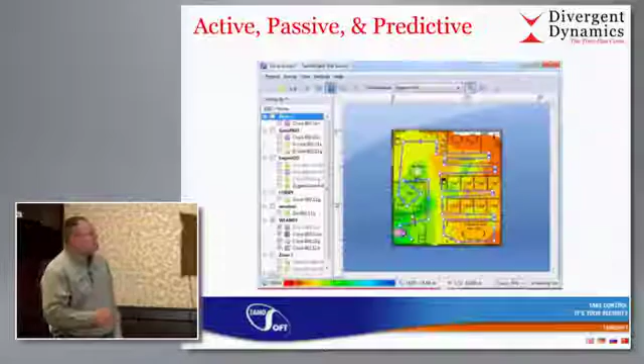So this particular tool, Tamograph, has a couple of versions, and I always go for the pro version. That's just me, but they have an annual license, and so on. Just the same, the pro version has active, passive, predictive, and the first question in a lot of you guys' minds is, is it as good as AirMagnet? Is it as good as Ekahau? As good as is relative. It's relative to cost, the features you need. If I were to compare Wi-Fi and say, is Ubiquiti as good as Aruba? I could say yes in some cases. I could say no in some cases, right? Depends on what you're doing with it. And so I think that's the case here as well.

I did want to mention, while I had the chance, that I've been doing a lot of wall measurements lately. So why would I do that?

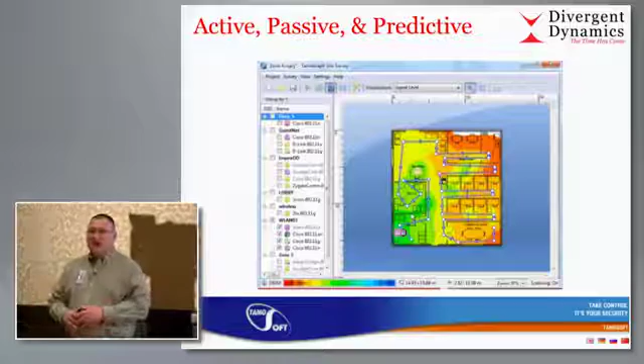Well, predictive modeling is inherently inaccurate. It's inherently marketing, in my opinion, because you really don't know what you have. You just think you have what you have, and you're relying on somebody to say these are brick walls, or poured concrete, or drywall. And even if they said it's drywall, is it double drywall? Does it have aluminum studs? And on and on. So it's guesswork.

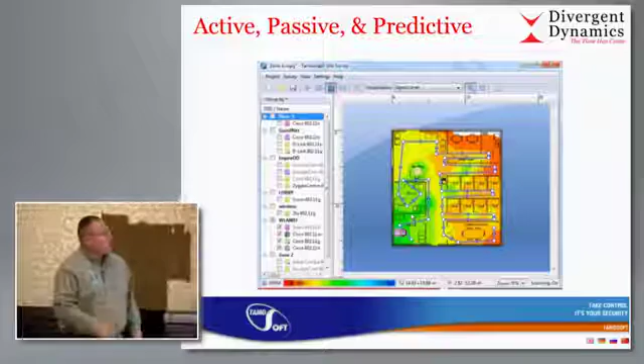So in order for it not to be guesswork, in order for it to be, I'll say, very accurate—to the point of 80 or 90%, real 80 or 90%, never as good as on-site doing an AP on a stick or a passive or active scan—but in order to make it reasonably accurate, you can measure walls. How do you measure walls? Well, we've been tinkering with that for a while now.

A small battery—you can buy any number of handheld small batteries. This one's 5,000 milliamp hours, from Amazon. You can get any number of them. And this little guy I've been tinkering with for a while: it's an access point/router, 11AC, single spatial stream. You don't need multiple spatial streams. It's a signal source and nothing more, okay?

Oh, you want to take a picture of that? Sure, absolutely. You're going to get the presentation anyway. But you can take it. Oh, you want me over there? Good Lord, can we have one conversation? I'm going to chase him down the aisle and give him a hug.

So we need a signal source. I've tried using the LinkSprinter, but it's 2.4 gig only. I need something for 5 gig because, as you might have heard, I'm not about 2.4 very much—we design around 5. We're always looking at 2.4 for interference and how we can use it if we can. But I wanted something switchable, and as you can see, there's a switch. It takes 30 seconds or so to boot up, and it can be a DHCP server, and it is by default.

There are features lacking in this little unit, but what I brought this up for—this isn't really part of the main presentation—is that when you're doing site surveys, this is a nice little tool, combined with either your laptop or software on your phone, to just measure loss in walls. Just be aware of that.

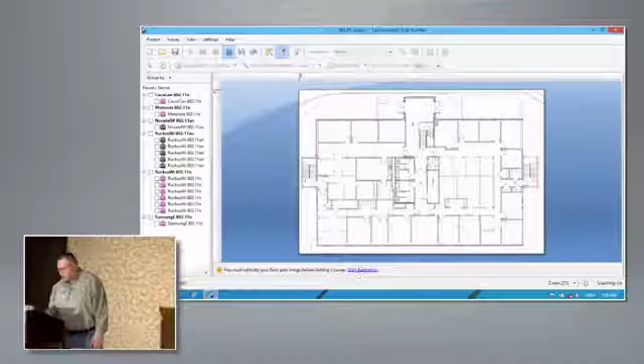Next, okay, so now we have a project. Guess what's next? Always calibration, every time. And guess what - it tells you to do a calibration. So you can start your calibration. You don't have to click on that; you can go up in the menu and do it. But this is pretty simple.

Just find a long hallway. If you guys aren't familiar with doing this, go buy a laser - just do it, go buy a laser and shoot the longest hallway in the place. Relying on 3-foot doors for buildings that take up 20 acres is not a good calibration.

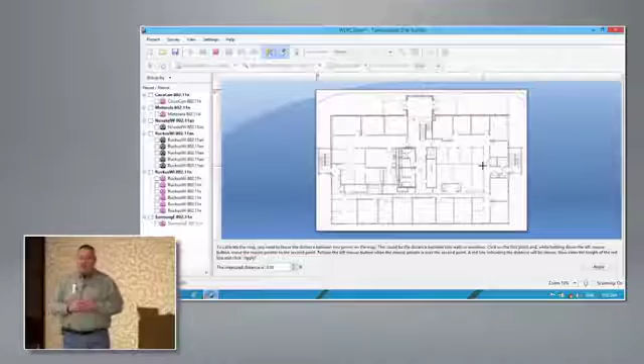Generally speaking, in one instance, I won't tell you who it is, but we were shooting 300+ foot hallways. There were some long hallways, and those make the map very accurate for scale. So in this particular one, I'm just making up 100, and we're calibrated. So piece of cake.

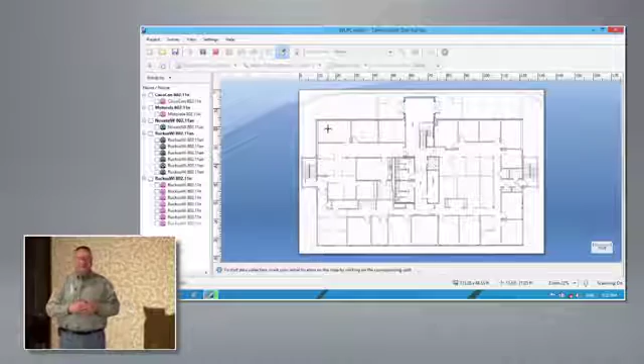This is, anybody see anything out of the norm here so far? Oh, me? Yeah, I'm definitely out of the norm. That's a good observation. Damn you, Alan. And no kidding, virtual hugs.

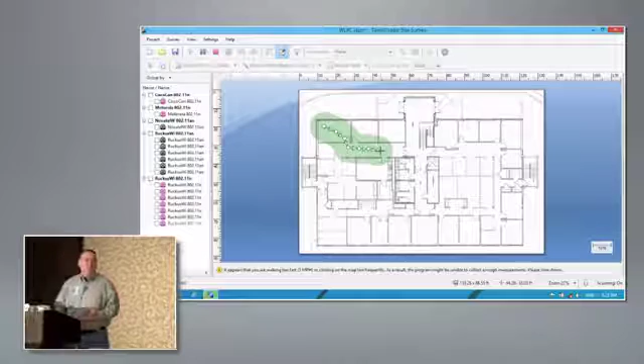So you just start clicking, of course. Now if you happen to be running down the hallway, or say you're on a Segway, and you start doing this, it's gonna say, hey, look at that, you're going more than 5 miles an hour. Slow down, pal. It's telling you that as you're going. Now you may want to say, you know what, I don't want to see that, don't show me that, and you can turn that off in the display. But by default, it's there.

Okay, so let's stop this. And so now we have a path, if you guys are familiar with the competing products. And I don't like to throw names around in the middle of the product presentation, obviously. It's one of the reasons I don't do product presentations, because I like to throw names everywhere. So we have a footpath here. Now that's where you go.

This one threw me in the beginning. You go back over to the left pane, and you go to surveys, and guess what? You've got the floor plan office, which is the graphic, and then underneath that, you've got this particular footpath. Okay, if I did another one, I'll just close this, have some real estate here.

We'll start another path, and on this particular footpath, we'll do the same thing. We'll start over here just because. And it'll tell us, hey man, you're running a little too fast there, pal. Okay, and then we'll stop. And if you come back over here, you see, look at that, we've still got that, right?

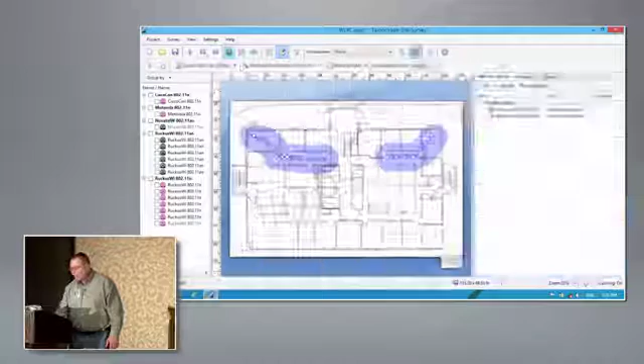So pretty standard stuff. If we want to save this, we can save it with or without this particular data. This is what data we've just collected, but you don't have to save it if you don't want it. You can simply uncheck it and then save the project, okay?

One of the things I was running into when learning this was the merging of surveys. A lot of times we'll create a document, and we'll have two different documents with, let's say, footpath and data over here and footpath and data over here, and now we've got to merge those documents into one.

In this software's case, the way it works is you create the document, save it, and then hand it to multiple people. Let's say you had 2 people surveying a school, and it's a humongous school. You say you get floor 2, I get floor 1, and you can split this up. I've already got everything calibrated, here's your copy, now you can run and do your thing, come back, and we can merge those footpaths together.

But you can't have 2 project files and merge those together because the maps are seen as different maps. You have to have some calibration reference point, and the way that's done is by creating the file to begin with and then sharing the file with somebody else.

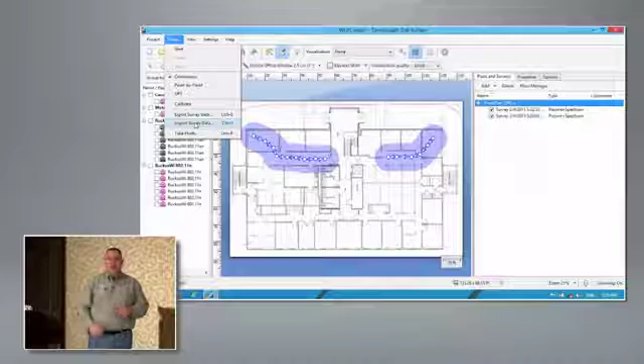You can use the import utility to bring their project data into this one. So you start off, you create a project, you save it, you hand it out. Come back, you import their data, you're done, and now everybody's in one, pretty quick and easy. Not intuitive when you've been using competing products that create projects separately and merge all that stuff together, so just be aware of that.

So if you want to do active, I've got all the adapters just kind of laying around here, but who cares.

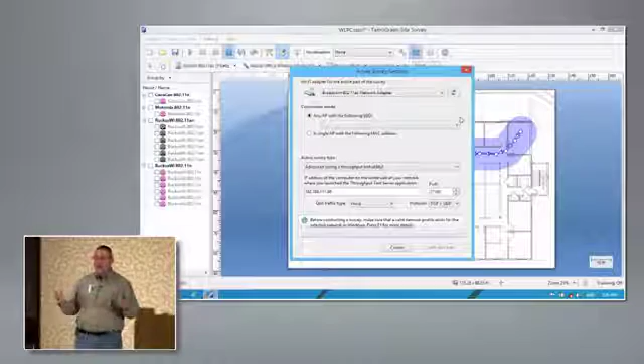So if you want to do an active survey, you have to have a client that is connecting to the access point as a client, moving data upstream, downstream, with whatever parameters you choose. And then you have to have the adapter that's capturing this data.

Wow, this is either I weigh a lot, which is yes, or this thing is a little creaky. I mean, every step, pow!

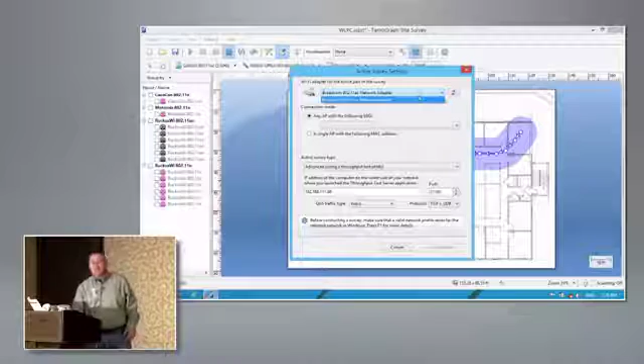Okay, so we've got the adapter that we're going to use for the active portion of the survey, connecting to the access point, moving data back and forth. Then we need to choose to get all SSIDs, or all APs, any SSID, or choose a single one, or what have you. It automatically knows which one we're using for survey, for the capturing of data.

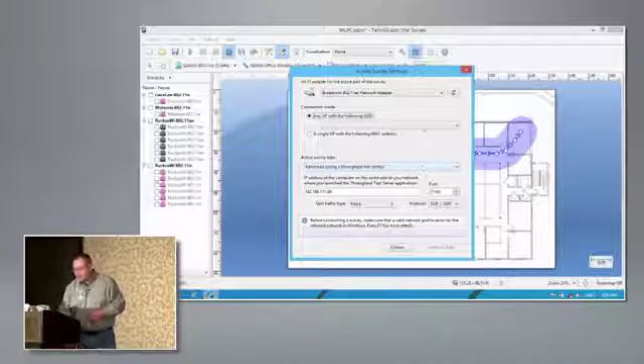And here we have, we can use just a ping, which is pretty easy, or do we want to use a throughput test utility? Tamosoft has a throughput test utility that's free, has a server, has a client. This particular software has the client built into it.

So if you just want to use their utility to test, a wired client, a wireless client, see what kind of throughput you're getting upstream, downstream, you can do that. You can load it on anything. But if you want to use it as part of the surveying process, then you load the server software, which is just a little Windows executable.

Let's see, do they have the Mac? Yeah, I think they do actually. They have the Mac version as well of both.

So I typically load it on just a PC somewhere, plug it into the wire, and that becomes my server. I need to know the IP address, and make sure the firewall's down on that box if it's a desktop PC. Then I point this one at it, like IP address and port, and it comes up by default, everything already pre-configured on the port. Then you get to decide TCP or UDP, what do I want to move, and you can configure those in the right panel. You can even mark it with QoS, which is kind of slick.

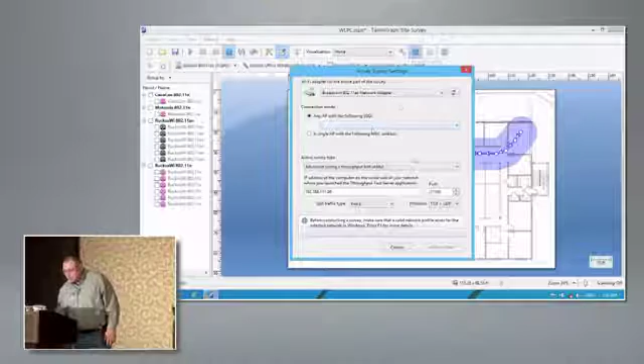So let's say I want to use this utility, not that I have it installed anywhere, but let's say that I do. Actually, it's not even capturing, what am I doing here? Oh, it's not on, I've got it on a little extension because I'm running out of ports here. Okay, hang on, that's good, let me pull this out so that it doesn't do this.

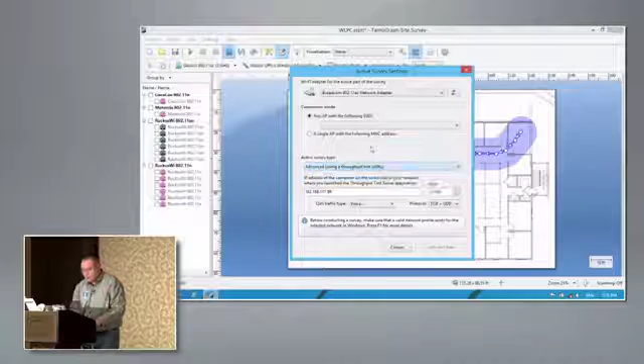It was giving me a little error there, active, there we go. Okay, that should actually come up with the SSID. That's odd. Still not coming up. This actually should be capturing the SSIDs. It did not. I could pull it in and start everything over, but you know how this goes, right?

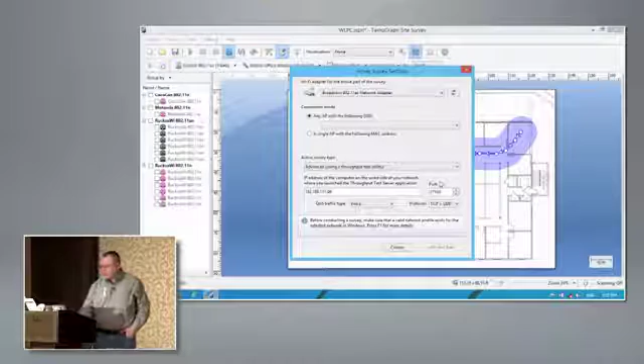So anyway, we point it toward the utility, wherever it is, and then we hit verify and start. It simply takes about 1 or 2 seconds, goes and connects that utility. What you want to look at as far as the configuration here is options.

1 second. That's not it. It is this one right here.

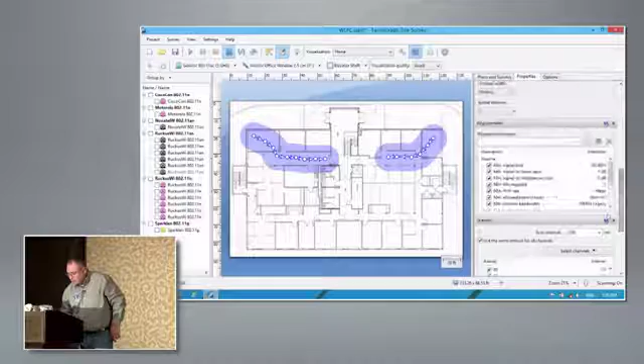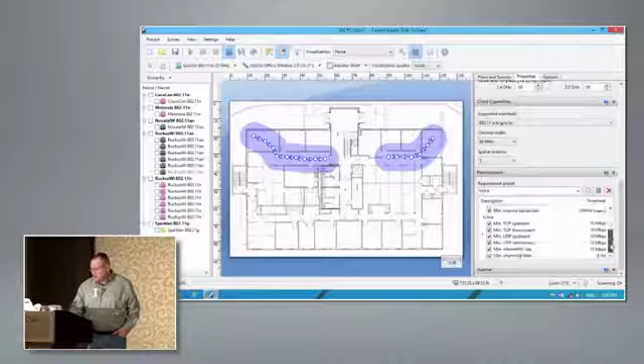Right here we've got some presets. So let's say we wanted to test voice grade, you can see how the presets look on the requirements. This requirements is for testing, for active surveying. So if I'm going to decide what signal level is required and so forth, this is where it's going to be - what's my minimum PHY rate, what channel widths are required, and so on. You can set all those things right here, uplink, downlink, etc. That's what it'll actually run through the test of - ramping it up and ramping it down.

Keep names out of the mix here, I'll just say I'm a user of product X. One of the things I always struggle with is product X has adapter calibration, which I find, depending on what environment I'm in, I'm always having to change. I didn't see you do anything like that with this product.

That's right. And because you guys know I'm a little bit on the assertive side, as in I speak my mind about that - calibration is stupid. It's ridiculous. It's meaningless. My profession before I got into IT was calibration. I did that in the Army for 4 years, and another couple years as a civilian. Working in calibration labs, that's how I learned RF, whether it was spectrum analyzers, signal generators, or power meters. I was stuck in RF labs for 4 straight years.

And the thing about calibration is it always starts at NIST, the National Institute of Standards and Technology, and every piece of equipment that is calibrated is traceable to NIST. So let's say I had something like a Wi-Fi card, and I want to say that thing is calibrated plus or minus 3 dB of accuracy - it'll come with a test report showing it's traceable to NIST, what it was calibrated to, the calibration period, what its tolerances are by the manufacturers, and whether it met them or not.

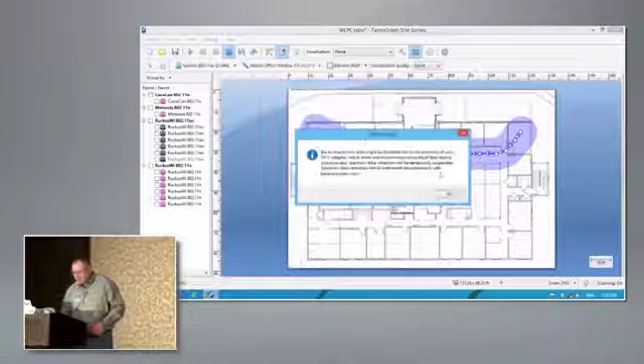See, the problem, Ben said it really well earlier. He said that in making these laptops smaller and smaller, they make us carry more and more stuff. And that's the problem. I've got 2 ports, and both of them are taken, I've got an adapter going to the display, and an adapter going to power, and I can't get my stuff in there. I got hubs hanging off of it. Okay, let's see. Oh well, still having the same issue there. Okay, and it's still not getting it. Well, that always happens. That's why I don't do product demos.

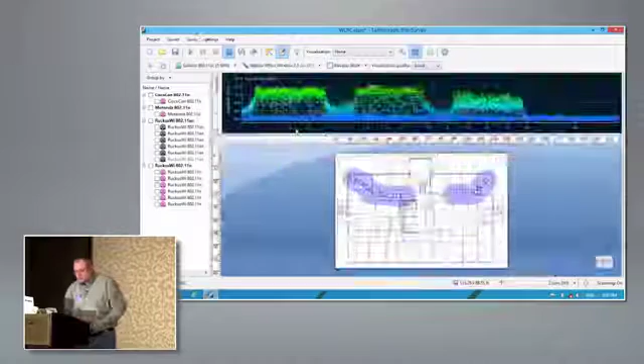So the next thing is, I've got a kind of a list here, and I was going to show you spectrum integration. Maybe I still will, if I can get it to, there we go. So one of the neat things here is the display is quite user-friendly, as you can see. And you can click, or right-click on the display, and set it for dual band, or just the bands that matter. You can set it to look at the band that's crap, and it actually does quite a nice display.

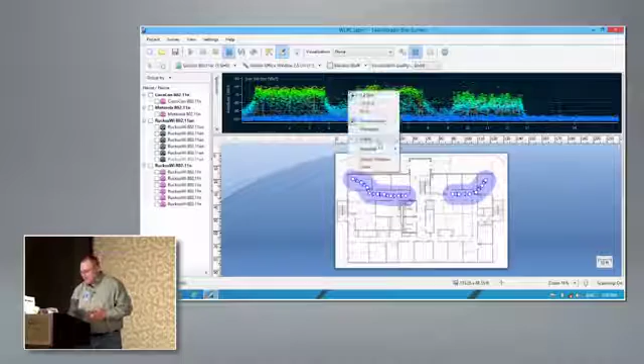It fills in a little bit slowly, and then you've got some options here. You can do it by channel or frequency. I always use channel myself. And then you can say how big, and you can have a waterfall. Let's say that we're going to set it as half the size of the window. So it's got a waterfall display and a real-time display. And I've got the MetaGeek adapter plugged in, as you might imagine.

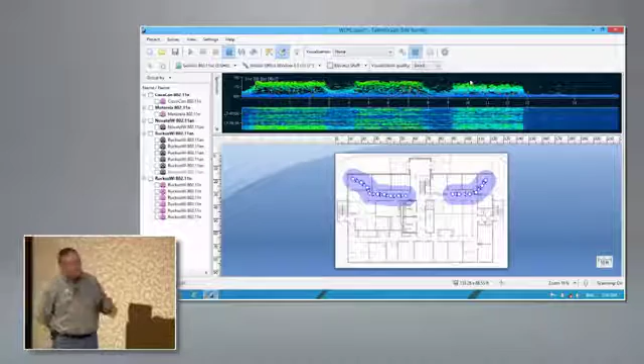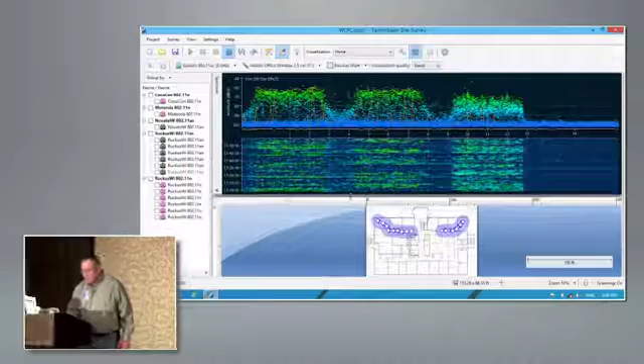And so the problem that I run into in any product trying to look at spectrum analysis is simply real estate on the display. I don't want a 14 or 15-inch laptop doing a survey, right? That's already hard enough on your feet and your back when you're trying to carry around an 11-inch MacBook Air, but I'm not carrying anything bigger than that. So what I typically do in this case is I simply turn off the waterfall unless I need to see it, right? And you can make it as big or small as you want there.

And you can detach the window as well. Great, it did that earlier. You see that? The reason for it is not the software, it works fine. It's the display thing. So I'll have to close this, and I'll show you how we'll fix that. So when you detach it with this screen attached, sometimes it's not happy with that. It's probably the fact that I'm boot camping a MacBook Air.

So we'll detach it here. There we go. See, now it works. So I can move it wherever I want to on the display to get it out of my way. My issue is it's in the way anyway. So I'll pull it up when I need it.

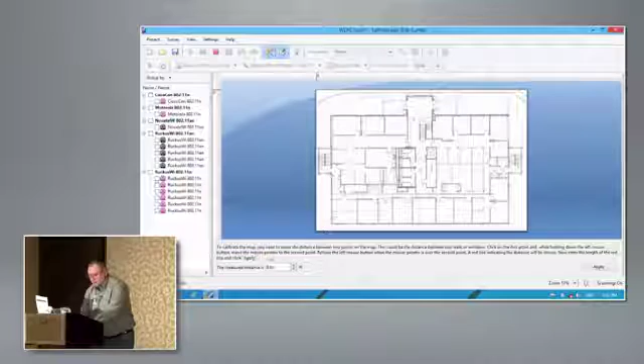Okay, so we can very quickly, again, make another one. I've gone through this little process so many times it's getting to be almost a habit. And next, and load an image, and poof, and next, calibrate. If only it was this fast in the real world, right? Okay. All right, poof.

So let's say we want to do this, let's see if it comes up this time. It keeps giving me that weird error - distorted due to proximity of your adapters. Huh, look at that, I guess they're sitting a little close, and it's still not coming up.

So the next thing was predictive modeling. One of the things I found a little unintuitive about this, I just wasn't used to it, is the view and virtual objects section. Virtual objects here is terminology for all of the stuff you need to do a predictive model. It's turned on right now, and the reason you know it's turned on is this row right here.

So let's suppose that I wanted to set a brick wall. This is going to be a brick wall from here to here, and maybe this one as well. Standard stuff, right? And maybe I want to move it, so with my little pointer I drag it over a little bit. It's a little better aligned there, and move it down there. So that's pretty standard stuff.

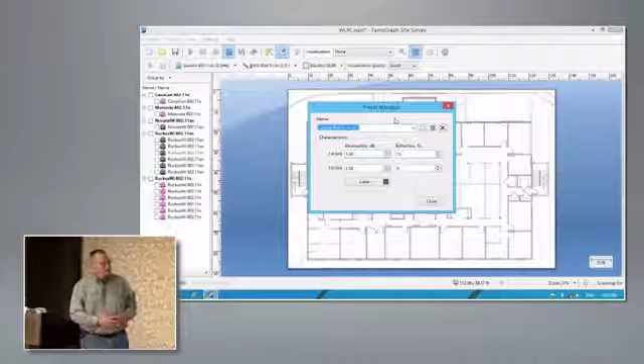And let's say that I want to modify - this is a big one for me - modifying these walls, because presets are great and all, but presets are rarely reality, especially if you're out measuring walls. If I'm in a facility where you've got double cinder block with poured concrete between it, and then wall lockers on the outside, and you're at like a 65 dB drop, show me one of those in here.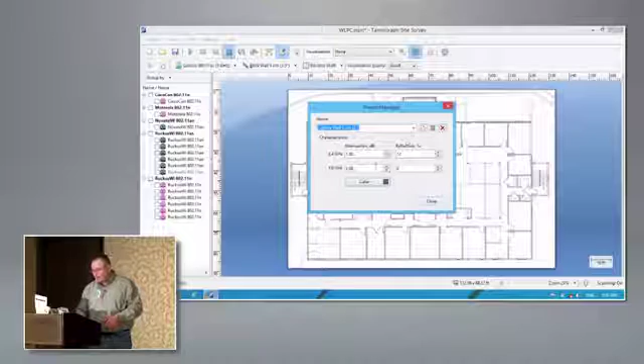So you can create that. You can just call it Wi-Fi hell, and make your own, with a color that should be like flaming red or something, okay. And so you can modify those, and once you modify it - let's say we're modifying this one just for giggles - you can hit save and save that one.

Now what I did ask them for last week, I said, hey, what if I were to screw up all the presets, like all of them, and I just want them to kind of snap back. And they said, oh, we can do that, that's easy, that's a button. So that's a handy little thing that can undo all of your tinkering, if you will.

Okay, if you want to delete those, there's a couple of ways to delete a wall. You can say undo the last point, or you can simply get your pointer, select it, and hit delete. It's that simple, right?

So as you can see, this is kind of what I would call a mid-market level tool. It's not the most sophisticated thing in the whole world, but it's probably 80%, in my humble opinion, for about 20% of the price. So that kind of value is really good for individual consultants who have to buy their own stuff, and for big fancy companies not buying anything.

That's always helpful. You can put APs on the map as well. So let's say I wanted to go with just a standard 5 gig AC, and we'll just put it right there. Mouse over it and you can see what it's configured for, but if you don't like that, of course - I don't know if I can select it - pointer, there we go, select your pointer and do properties.

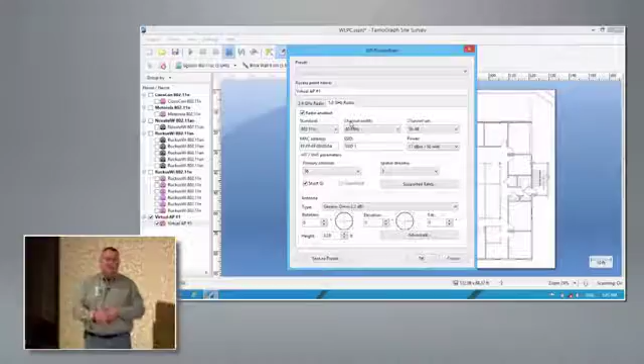And remember, it was 5 gig only, so the 2.4 is turned off. 5 gig, and you can set all the different parameters of this. Now, call me crazy, but this brother is not going to go through 1,000 APs individually setting them like this. This is really nice for a smaller scenario, but of course you don't have to do this - it's not required, this is just for some predictive stuff. But Lord, if you're trying to manually do stuff with this, if you had all these features to configure, holy moly!

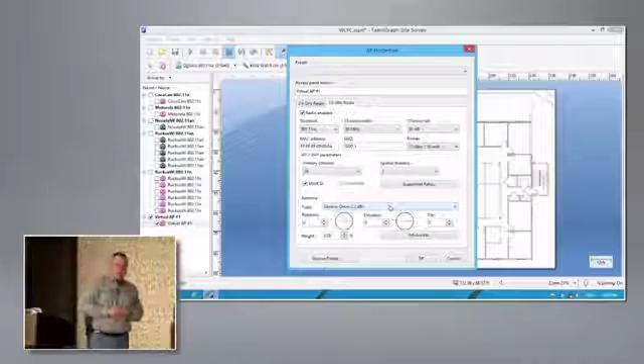You can do exactly the same stuff in the more, I'll call it, enterprise class products. But I don't use those features or those products either. This is not my favorite thing, but it is very sophisticated, as you can see. If I wanted to say 40 megahertz, you can see now I've only got pairs over here. If I want to do 20, then I have just the channel numbers and so on.

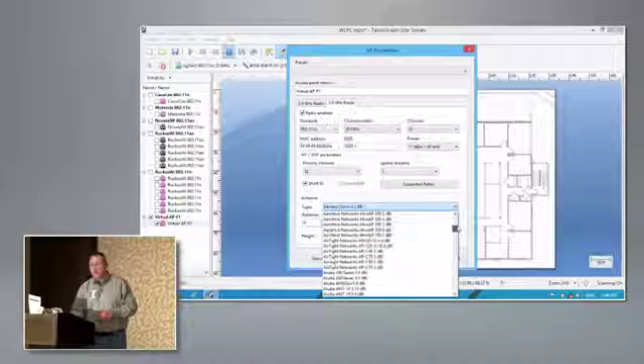They've got an amazing array of antennas in here, and it's just getting to be more and more. They add antennas just like they add drivers - it's ridiculous. So I've always thought that's good. You can just pick a vendor, you can see just how many they have, and it's growing.

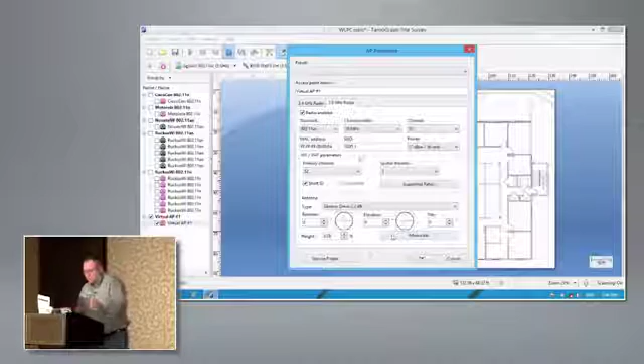So that part I like a lot. Let's say I wanted to create this AP, so it's out there. Look on the left side. So the AP that I have here is now listed among the APs that it can hear. And if I want to delete it or change its properties, I can do it over here, just like I can do it on the map itself.

Now, had I done a walkabout, a passive walkabout, and gathered data, then for the ones it gathered sufficient data on, it can try to extrapolate where those APs are, just like all the software can. You can drag them around, since it's not really right there, it's more right here. Of course you need to actually do the walkabout for it to have that data. It will know, say for this particular Ruckus AP, approximately where it heard it, and try to put that on the map accurately. And then you just go back and...

Like walls, you can actually also define APs. Yes, that's correct. You can define custom APs, and I've done that myself in the software, and it's very useful. You can kind of match up generic patterns, and if you have an AP that's not listed in there, you can list a close generic pattern. With, hey, this is a 3-stream, and this other one's a 2-stream, and you can kind of create your own presets.

Yes, and you can mix and match your predictive with your passive. So if you say, 'my passive shows I have a hole there,' and you go, 'I want an AP like this with 2 streams there, what's that going to look like with a 40 megahertz wide channel on channel 56, plus or what have you?' You see the point there? So you can pull those together into one map, which is very nice.

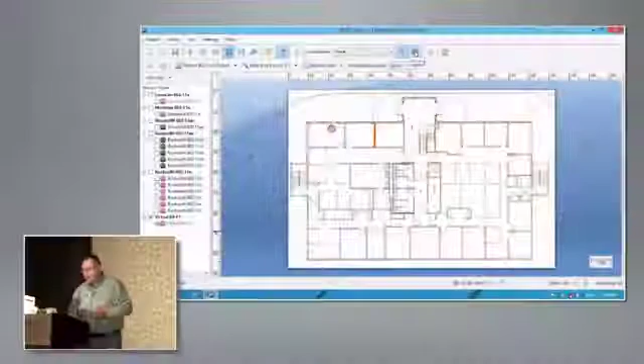So it's always good. When you're messing with APs, you can apply settings to selected APs or all APs. If you wanted to auto place them after a passive survey, you select the ones you want to auto place, put it on selected APs, and then tell it to do it. Okay, so then the visualization.

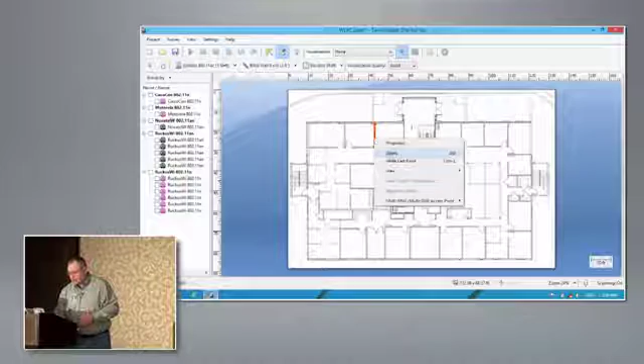Let's kill some of this stuff off and then do the visualization. Delete. There we go. I'm even going to delete this wall just for fun. Okay, so we're going to do a little passive survey. Actually, I want to take out the spectrum card for this one. Okay, and passive, and we just start cranking through it, right?

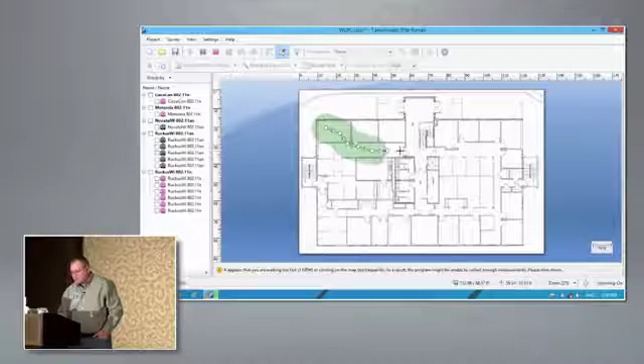Running down the hallways, screaming, naked, building's on fire. How many of you guys have done surveys in the middle of the day, at schools, where they continually ask you what you're doing? You make it into a game to see how many scenarios you can think up on the fly. It's like we're looking for ghosts, or checking for radon gas. I had a scenario where a teacher was making up better stuff than I was, and I thought, wow, I'm using that in the next classroom. I had one scenario where they were doing standardized testing, a spelling test at a grammar school, and I'm walking over children grabbing at my legs while trying to survey. I walk into this room and they said, 'okay kids, let's spell the word up.' I thought, wow, this must be first grade. I walked to the next room in the cluster, and as I walk in the door, not kidding, the teacher goes, 'okay kids, let's spell the word up.' I said, wow, what's the chance of that? I go to the third room: 'okay kids, let's spell the word up.' I thought, that was odd. I went to the fourth room saying to myself, 'I know, let's spell the word,' and she goes, 'up.' I thought, holy crap, somebody's talking to me about something. That was odd, and so was trying to break dance over children.

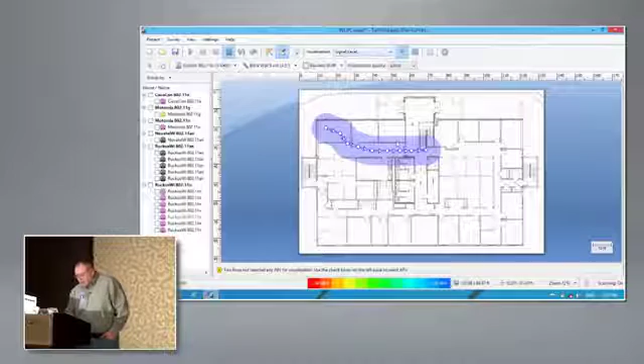So let's stop the survey and visualize. For example, you do not have any APs selected, so let's go with all APs. Yes, I don't know, let's just check them all.

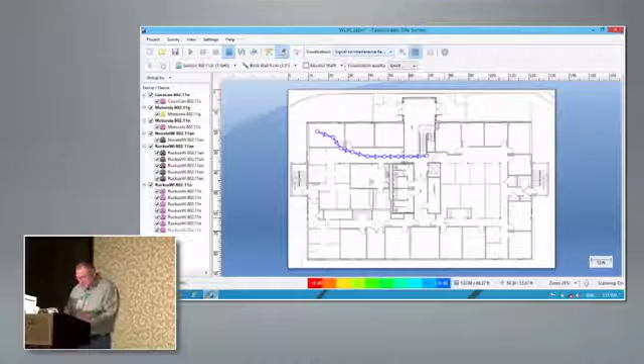Yep, signal level. Why is it not doing it? You know what, this is a little strange. Let's see if it's going to recalculate. No, it doesn't, why not? Oh, this is the best part of the whole thing. Come on, where's the love? That's why I don't do these things.

There we go, well I guess my computer's a little slow. Let's go back to signal level. Oh, we don't have any. That'd be why, okay.

Let's do another little bit of a walkabout. My adapter's on, the other part of the building will be better. Sure it will, make me out to be a moron. Yeah, so...

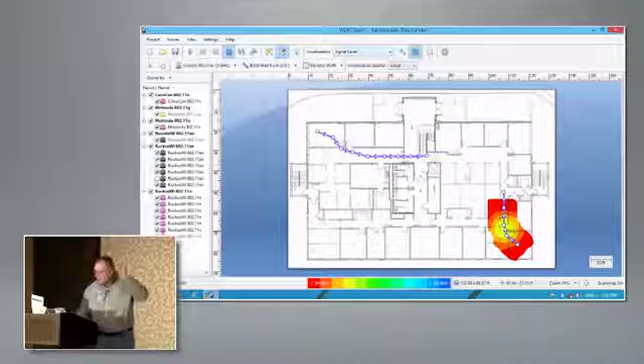There's a lot of visualization here just from the drop down. Now some of them, if you'll notice, are passive only, apply only to passive, and some only apply to active. So if you're looking at round trip time, or did it meet the criteria for UDP upstream, or TCP downstream, or both - all those parameters that you set in the requirements...

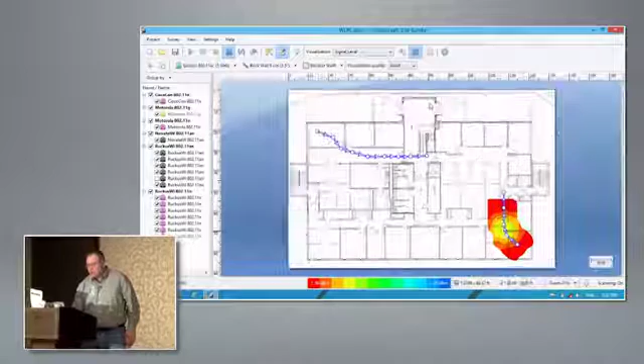Over here in the requirements, if you set all these thresholds, then it will show you visually whether you met them or not. And this little color-coded bar across the bottom is labeled with data rates and throughputs and those kinds of things, not just signal levels. Depends on what you're selecting.

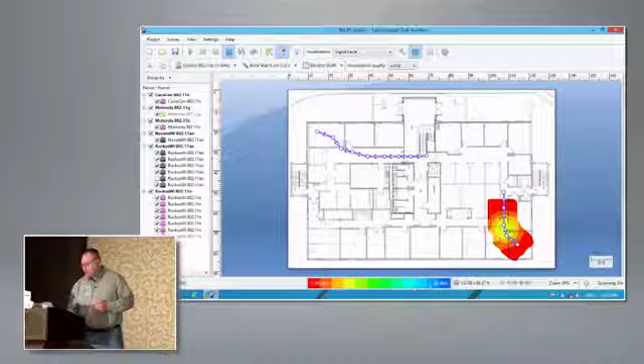Since I just did passive, if I want to select channel bandwidth and so on, you can see it's looking at all the different PHYs that it's capturing and so on.

Let's see, generating reports. Yes, settings - come on, where's it at? I forget where half the stuff's at. Generate report, that might be it.

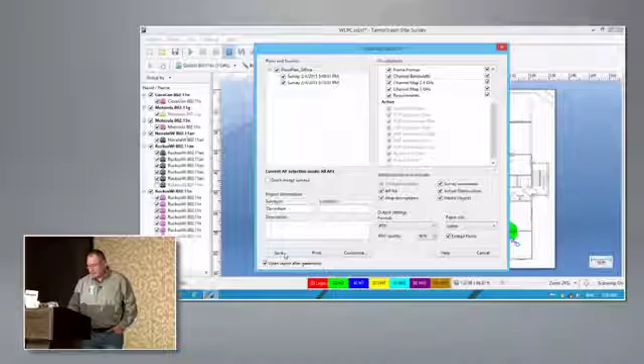Okay, so we've done two footpaths. If we want to generate a report for both of them, we simply check both and decide what's going to be in there, as you can see here. There's a lot of options here, and then you can send it to save, print it to a PDF, or what have you. Save - and there's PDF, and I'll just drop it on the desktop.

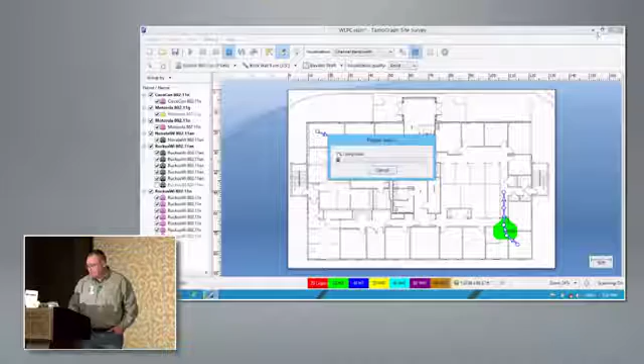Look at that, go go go. Gadget report. So, can you export the data to XML? Export to XML, I don't know - that's a good question. So anyway, it's generating a report.

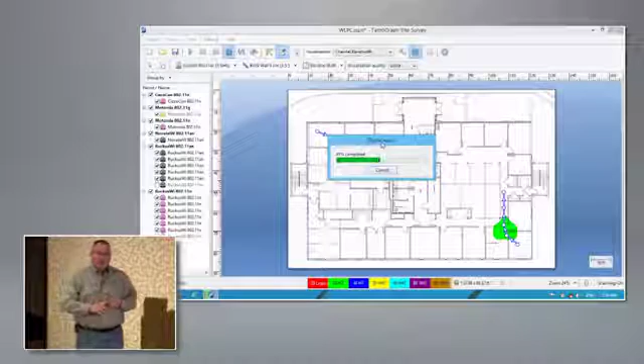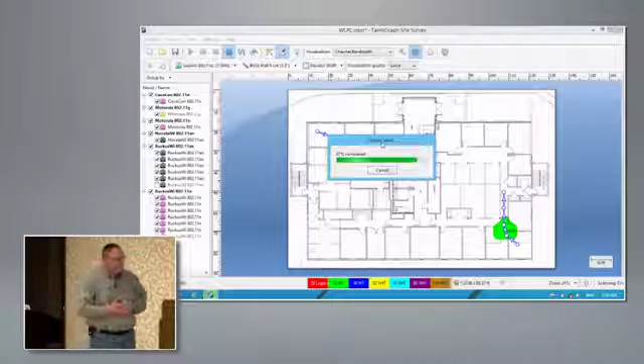So we have, I'm almost to the end of my time - we have active, we have passive, we have predictive, we have ease of usability. We have about 20% of the cost of most manufacturers. It can generate reports, it can do indoor, outdoor, with GPS and so on, depending on the version that you buy. So I would call it, in my opinion, it's probably 80% of what you'd expect on features with 20% of the price.

Chris, with the spectrum analysis, when you're capturing that as you're walking around, do you have any way of tracking exactly where the spectrum analysis was caught?

Yes, that's right, you do. So I was going to scan through this - here you can see it's got all the graphs, it explains what it is. It's standard reporting, all the others do pretty much the same. It's very user friendly, it's automatically generated.

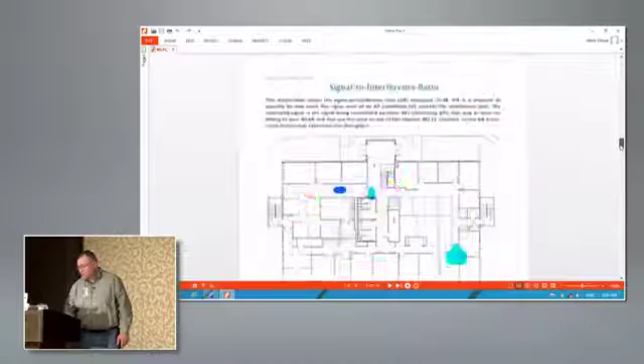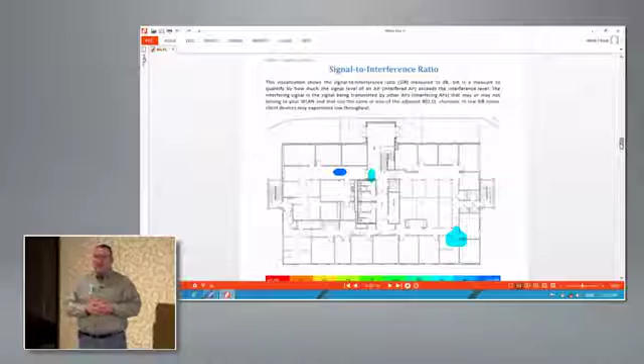So Chris's question was, with spectrum analysis, do you know what the spectrum looked like wherever you were? Is that the right question? Yes. So it's being captured and it's being noted as part of the footpath. When you mouse over the footpath, the spectrum will show you what it looks like at that specific location.

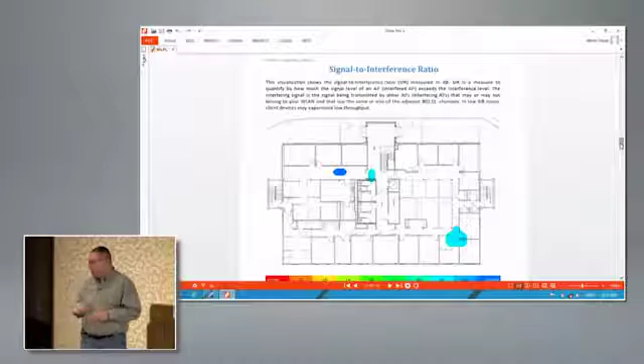And if your mouse is off the footpath, then it's still capturing in real time. Even if you stopped, it's just sitting there, basically spinning idle. But once you're capturing, it's being collected with the survey data at the footpath points, at the collection points. So, to show you - not that my spectrum adapter is wanting to act nice, but we'll see.

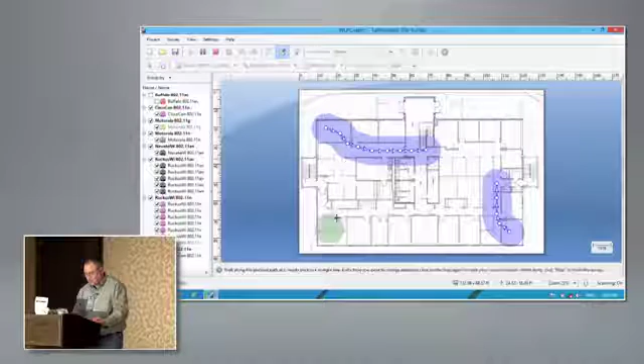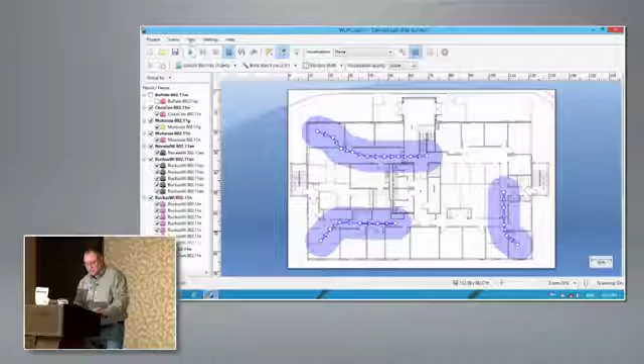Okay, and so stop, and here, let's turn on spectrum. View spectrum, there it is. See, my mouse is off of it, and you're just sitting there watching, real time, what it's capturing for whatever band you're on. So I've got this on 2.4 right now. But if I click here, you can see at any point in this footpath what the spectrum looks like, and it's on these points.

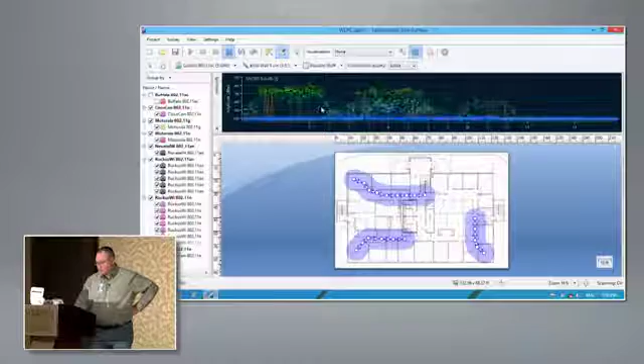So as I mouse over this - come on, catch up - yep, waterfall, like this. If I click here, that's what it looked like. Granted, I was going click, click, click, click, click, so I didn't have time for the waterfall to get going.